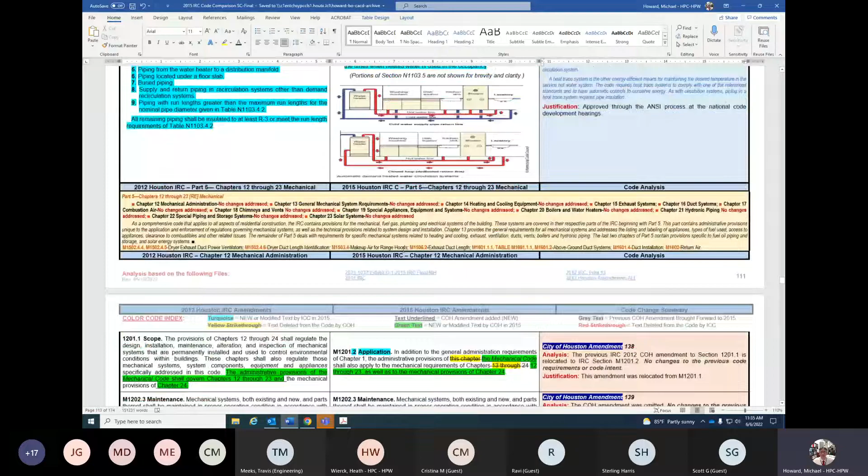Okay, pretty sure we left off right here, Houston Amendments. In Chapter 12 is the Mechanical Administration section, and you'll notice that Section M1201.2 application, we have an amendment in this section that basically says that the administrative provisions of the mechanical code shall also apply to the mechanical requirements of Chapters 12 through 23, as well as to the mechanical provisions of Chapter 24 of the IRC, or of this code. Probably should have said this code, but I think there's no real change.

You can see that in the previous Houston Amendment, the same code amendment was in there. So there's no change to the code requirements. No changes to the code intent for that section or the next section for maintenance. There was a previous City of Houston Amendment that struck the last sentence to the maintenance section. And we didn't really have a justification for why that was struck. So we weren't able to justify striking it in the current code. So that previous Houston Amendment in M1202.3 is no longer striking the last sentence.

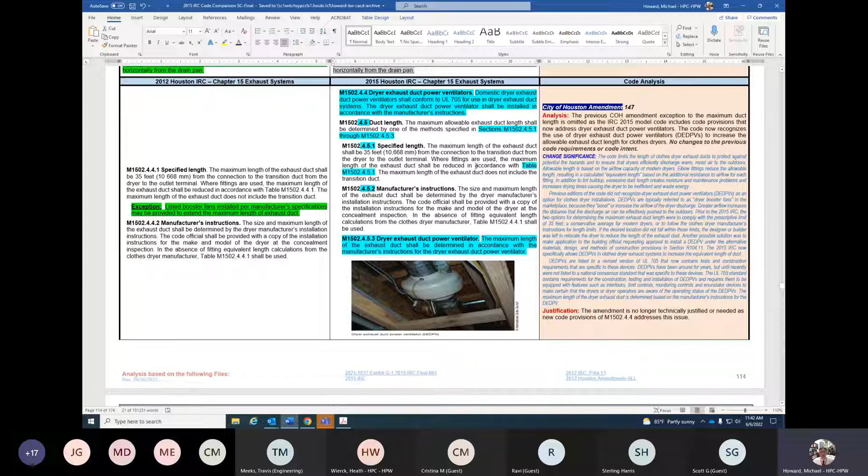There was a previous City of Houston amendment exception to the maximum duct length in the IRC. It's omitted as the IRC 2015 model code already includes code provisions that now address dryer exhaust duct power ventilators. As you can see, this particular section 1502.4.4 dryer exhaust duct power ventilators was extensively updated by the model code, and you can see that by all this blue text. So now they're allowing these dryer exhaust ducts to use power ventilators to extend the length of the duct, where they didn't actually talk about those items in the past. So that's actually going to be a slight change, and it should allow for longer lengths of domestic dryer ducts, where the dryers actually include those power ventilators.

As you can see here in M1502.4.5 of the 2012 code, there was a Houston amendment that said where the overall length as specified by a particular section exceeds 35 feet, the equivalent length of the exhaust duct shall be identified on a permanent label.

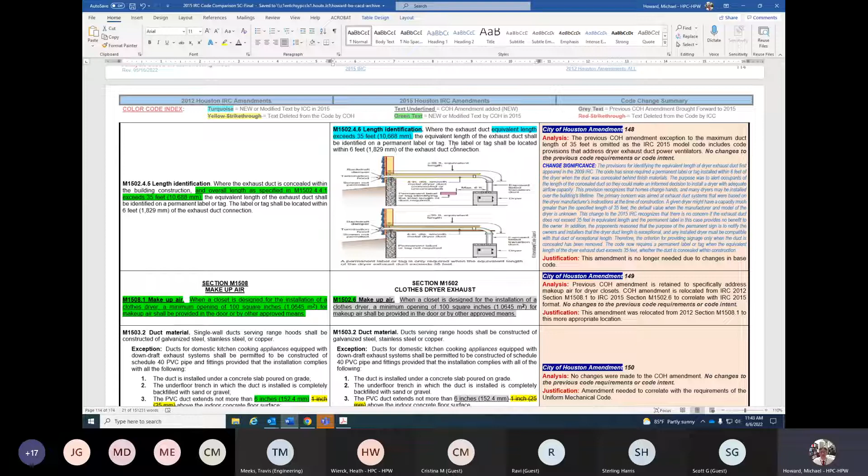Length identification is now located in M1502.4.6, not .5. And basically, it's saying that where the exhaust duct equivalent length exceeds 35 feet, the equivalent length of the exhaust duct shall be identified on a permanent label or tag, just like the previous code. So there's really no changes to the previous code requirements or code intent.

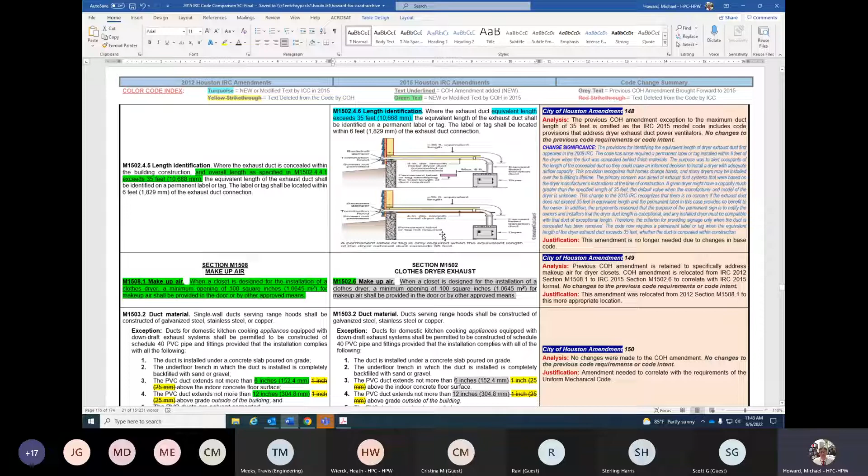If you're exceeding that 35 feet for the dryer duct length, then you just have to identify that on a label next to the dryer duct.

The previous City of Houston amendment for makeup air in section M1508.1 was brought forward, but it is now located in M1502.6, which is titled makeup air. And the requirements didn't change at all. It's the same requirements, but the previous amendment is retained to specifically address makeup air for dryer closets. The City of Houston amendment is relocated in the new code, as I said, but the code requirements did not change.

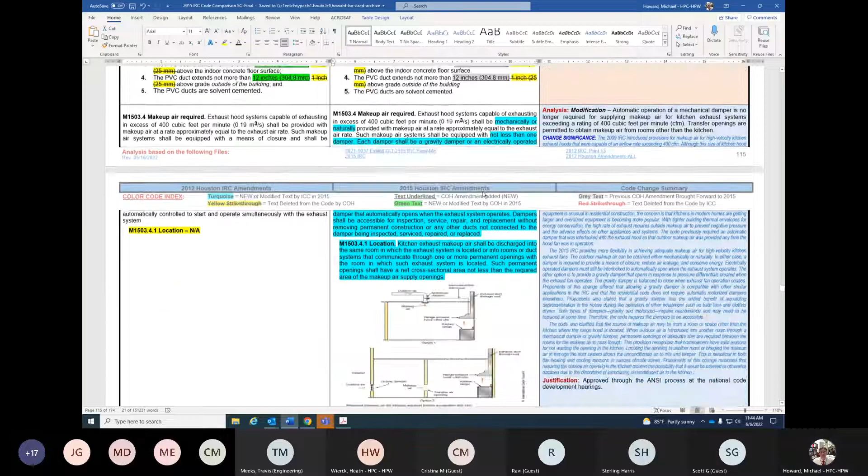There was a Houston amendment in section M1503.2 of the 2012 code, and that was brought forward to the same section in the 2015 code with no changes, and you can see that in this particular code comparison. Let's get down to the next City of Houston amendment.

Chapter 16 is duct systems, and the previous City of Houston amendment was omitted. This amendment is no longer needed as duct design requirements of SMACNA address the issue sufficiently. The list of duct system requirements has been revised to reference the applicable standards and delete redundant language. The table for material thickness of metal ducts was replaced with what is currently consistent with the SMACNA sheet metal construction standard.

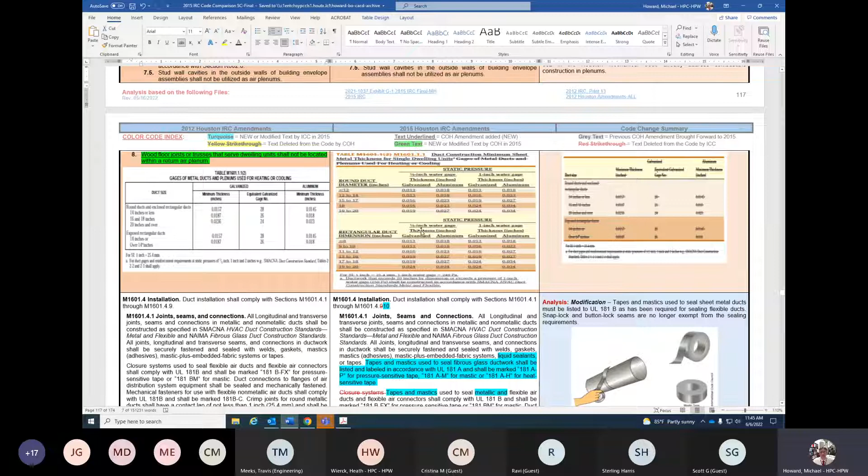So essentially, the model code is being used in this case, and we didn't really need to include this previous strikeout because it's already sufficiently addressed in the current codes. You can see that they added this table, M1601.1.1, duct construction minimum sheet metal thickness. So now there's this table in there that goes into a lot more details about the thicknesses of duct, which comes straight out of the SMACNA standards.

As you can see in the previous code, there was a table for gauges of metal ducts. Well, that got completely replaced by this new table.

There was a City of Houston amendment in M1601.4.3 for supports, which identified certain size requirements for the metal straps and galvanized wire at certain intervals. And now the model code basically requires you to comply with the SMACNA rules for those same requirements.

And that should help these mechanical installers because they're already familiar with SMACNA anyway. So if they know the SMACNA rules and requirements, they can just completely follow those and not have to worry about violating an IRC requirement.

Again, this is one of those sections, M1601.4.9, that talks about flood hazard areas, and there was a previous pointer to the city code, which was retained and brought forward into the new code, but is now located in 1601.4.10. So the code section just changed a little bit, but the intent and the requirements did not change at all.

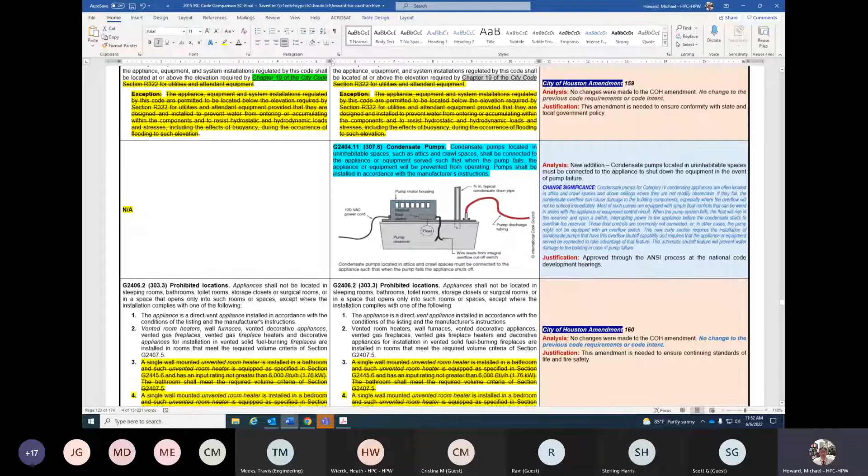Again, section G2404.7 of the previous code and the current code have to do with flood hazard areas and just have a pointer to the city code chapter 19. No change to the code requirements or code intent.

There was a City of Houston amendment under prohibited locations that struck two of the listed items, and we brought that same Houston amendment forward with no changes other than just bringing it forward. So the same two items that were struck previously are struck in the new code.

There was a section, G2411.1.1, that addresses CSST, corrugated stainless steel tubing, and there was a sentence added that basically said corrugated stainless steel gas piping systems shall be bonded per the manufacturer's installation instructions. The City of Houston Amendment was omitted, as the model code specifically requires compliance with the manufacturer's installation requirements in every application. So it was felt that we didn't need to add a City of Houston Amendment to this section where it was already addressed. That previous City of Houston Amendment was eliminated. There's no change to the code requirements or the code intent that have to do with corrugated stainless steel tubing.

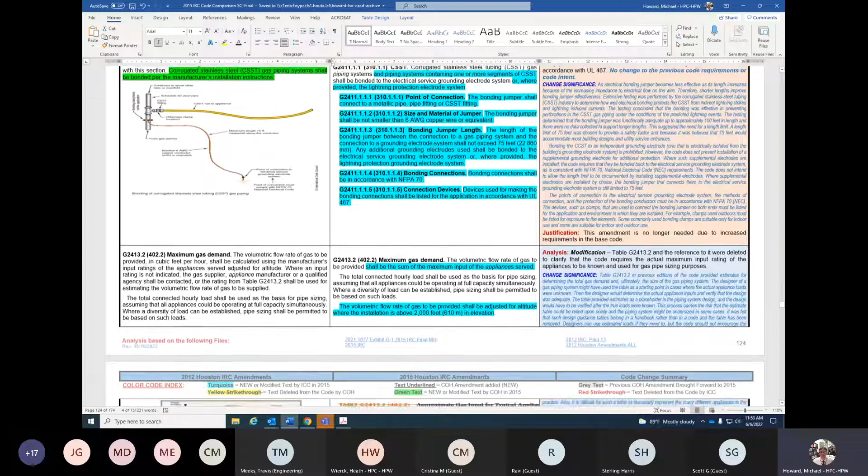The previous City of Houston Amendment in the 2012 code for liquefied petroleum gas was brought forward with no changes.

Let this person in real quick.

And that was in section G2412.2. As you can see, when it's grayed out like that, it means the Houston Amendment did not change. It just came forward just as is.

Same thing in the very next section that talks about sizing for gas piping. The previous City of Houston Amendment was just brought forward, and there's no change to the code requirements or the code intent.

Section G2413.6 was struck in the 2012 code, and the same section in the 2015 code was struck also. We just brought that City of Houston Amendment forward. So there should be no change to the code requirements or code intent that applied and were addressed by that section.

Metallic fittings. There was a previous City of Houston amendment under metallic fittings, number 3, that says brass or bronze fittings, if exposed to soil, should have a minimum 80% copper content. That same code requirement and Houston amendment was brought forward into the 2015 code. And as you can see, there's a lot of blue, so the model code actually expanded to include an additional item listed in this particular section. It now says where pipe fittings are drilled and tapped in the field, the operation shall be in accordance with all the following, and then it lists five items that everybody will have to comply with if drilling and tapping fittings in the field.

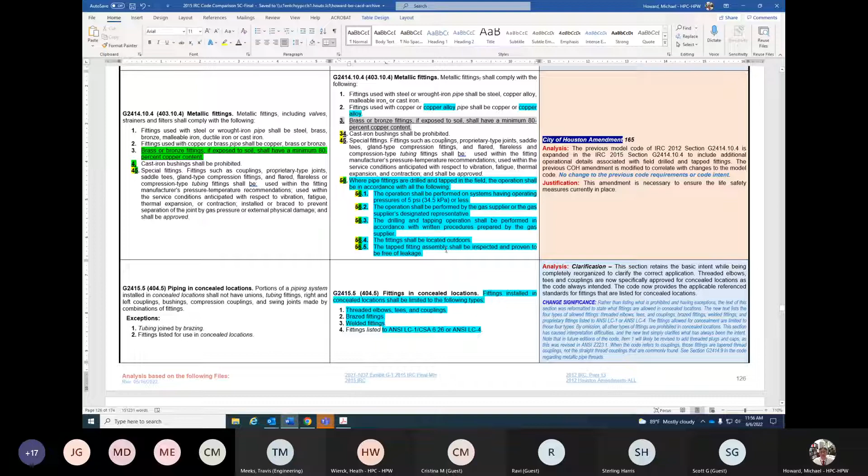In G2415-6, the previous City of Houston amendment was brought forward. There are some minor editorial changes to delete requirements that are already included in other volumes of the Houston Construction Code, so it wasn't felt that it needed to be duplicated in the IRC. The extended text of the previous amendment is no longer needed since specific details are identified in HPC handouts, which the Houston Permitting Center provides to address certain things identified in this previous code section.

The next two sections cover protection against corrosion and individual outside appliance. There are two City of Houston amendments from the previous code that were brought forward, with no changes to those particular requirements. So the intent should remain the same, and the application should remain the same.

That also applies to G2415.17.1, limitations for plastic pipe. The previous City of Houston amendment included a dimension for a minimum depth of 18 inches of coverage, which you'd think is a typical coverage requirement for all gas piping, but apparently if you don't mention it, someone will not bury it as deep as it's supposed to be.

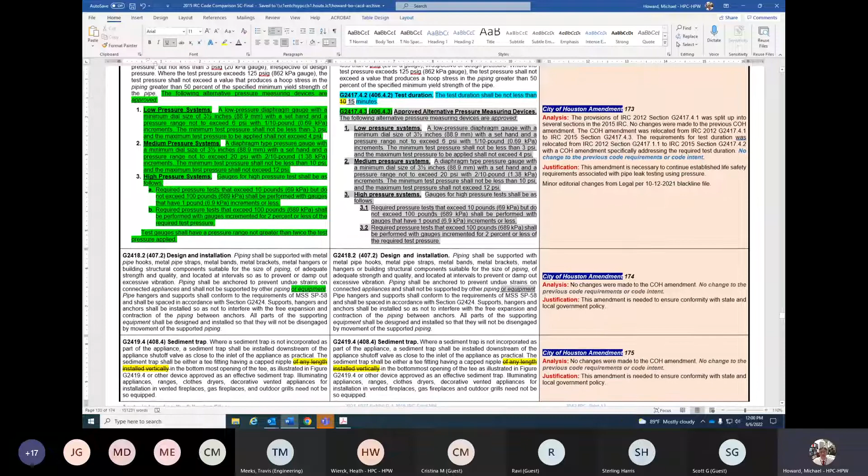Again, G2417.4.1 goes into more detail about the test pressure requirements, and the previous City of Houston amendment was brought forward to the 2015 code. You'll notice it's worded a little differently - it just has numbers instead of letters under item 3. But other than that, it's exactly the same as it was before, so there shouldn't be any change to how you guys do business out in the field when you're trying to get your pressure tests done.

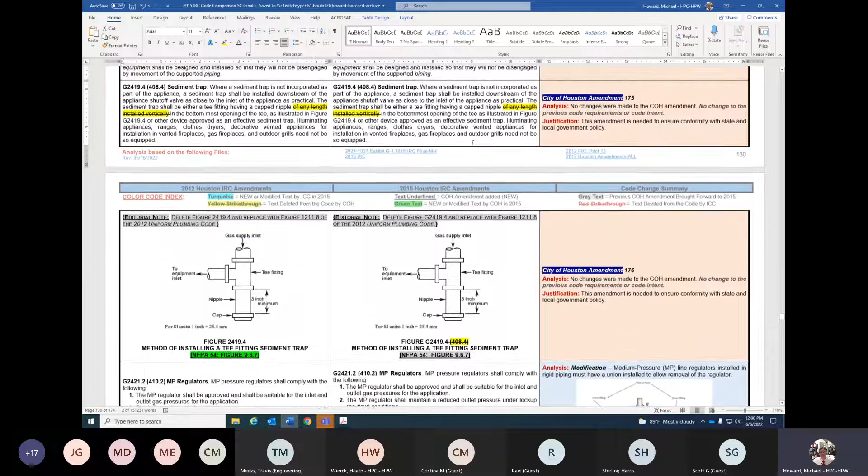Same thing applies to G2418-2. There was a minor previous City of Houston amendment that was brought forward to the new code. Same thing goes with the very next section for sediment traps - there was a previous City of Houston amendment that struck a few words out of the model code text, and that same text was struck out of the 2015 model code.

In section G2423.1, there was a previous Houston amendment that addressed CNG fuel and other operations, and that same amendment was brought forward, basically saying it has to comply in accordance with the fire code. It has to do with motor fuel dispensing facilities for CNG fuel, and their operation shall be in accordance with the fire code. There's no change to the Houston code requirements. I don't really know anybody with a residence that would have something like this, but I guess it's possible.

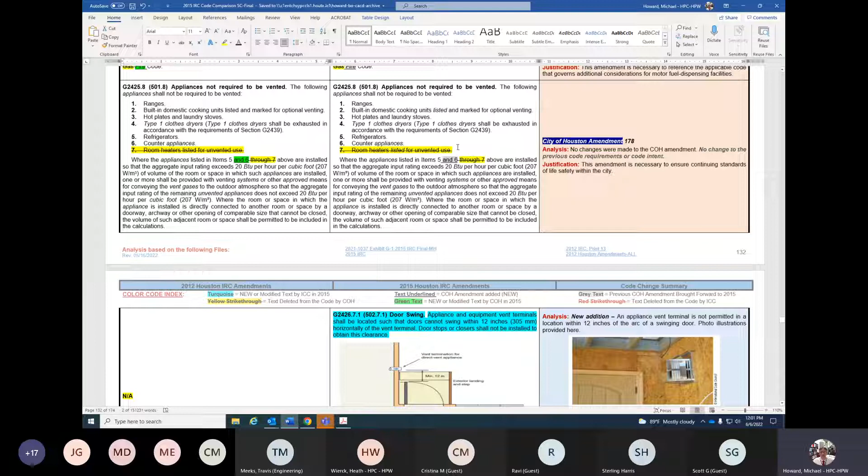Appliances not required to be vented - there's a Houston amendment that was in the previous code, and that amendment was brought forward. It eliminates item 7 out of this model code text, and there's no change to the previous Houston amendment or the code intent.

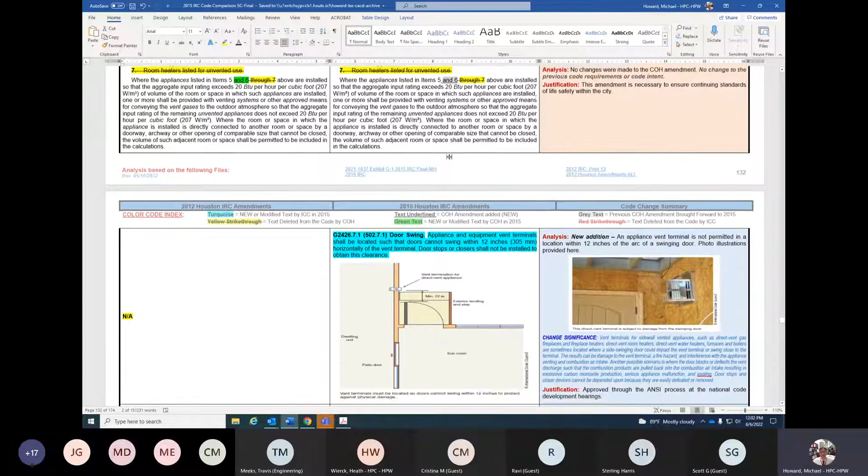Back down to specific lengths - where are we at? The maximum length of exhaust duct shall be 35 feet. Here it looks like we're back in dryer duct vents. And there's an exception that says listed booster fans installed per manufacturer specification may be provided to extend the maximum length of the exhaust duct, as we talked about earlier. There's another section that goes into even more detail about manufacturer's requirements and lengths, but the previous City of Houston amendment exception was maintained and brought forward into the new 2015 code.

In G2439.5.6, there was a previous Houston amendment stating that when the overall length specified in a particular section exceeds 35 feet, certain requirements apply, including identification on a permanent label or tag. Those same requirements are brought forward into the 2015 code, so there's no change to the previous code requirements or Houston amendments.

Unvented room heaters. There was a previous amendment in G2445.1 that basically said unvented fuel burning room heaters and decorative appliances shall be prohibited. That same section was brought forward to the 2015 code, but now it's worded a little differently. The title is 'prohibited fuel burning room heaters and decorative appliances,' and it states unvented fuel burning room heaters and decorative appliances shall be prohibited.

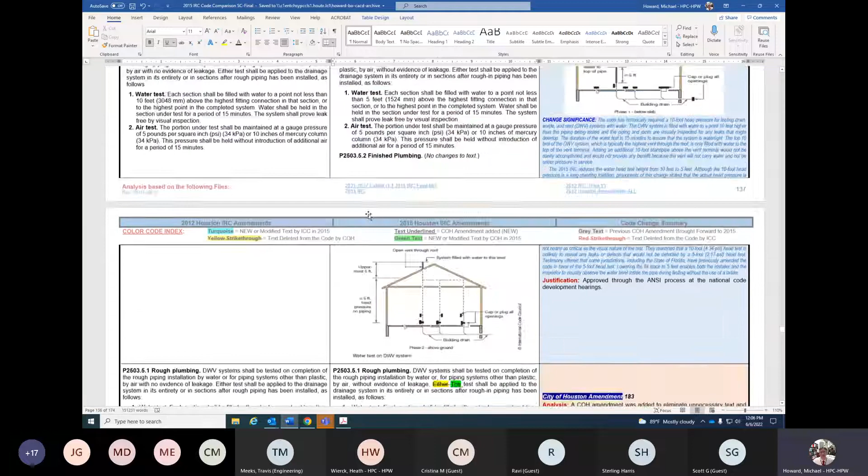Rough plumbing. In the 2012 code, there was no amendment to the rough plumbing section. There is a City of Houston amendment added to eliminate unnecessary text and to ensure that DWV systems are installed and tested in accordance with minimum city standards and typical plumbing installation requirements. That's why you see some of this modified.

There was a modification done to section P2603.2.1, protection against physical damage. For piping installed through bored holes or in notches, the minimum clearance distance from the concealed piping to the edge of the framing member has been reduced from 1.5 inches to 1.25 inches. Protection is required for piping installed less than 1.25 inches from the edge of the framing members. So as long as you have more than 1.25 inches of depth, you wouldn't necessarily have to provide this protection.

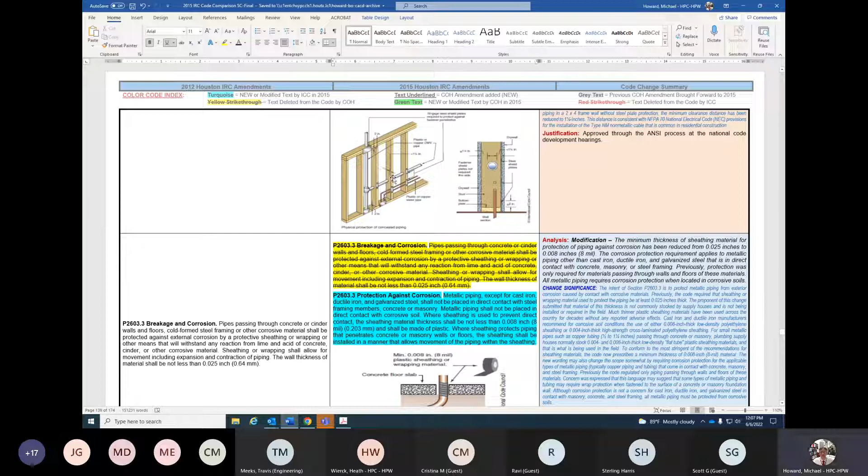You can see this example here where the pipe is going through the plates, and they have to put a steel plate in front of it to prevent someone from driving a nail or screw into that pipe. You can see this through all of these locations. But if you have enough depth, you wouldn't necessarily have to deal with that.

General: shower compartments shall have not less than 1,000 square inches. That Houston amendment, which was in the 2012 code, was brought forward to the 2015 code, along with the other two amendments in exceptions 1 and 2. There's no change to the code requirements or code intent for these particular code provisions, so it should be the same as it was previously.

There was a Houston amendment added to section P2708.2 for shower drains, now requiring a size of not less than 2 inches in diameter. The amendment was added to correlate with the minimum requirements of the Houston plumbing code. This is one of those situations where the residential code was a little different from the Houston plumbing code, and we needed to correlate those two.

There was a previous City of Houston amendment provided for P2709.5, test for shower receptors. That previous Houston amendment was brought forward with no changes, so there's no change to the code requirements or code intent for that particular issue.

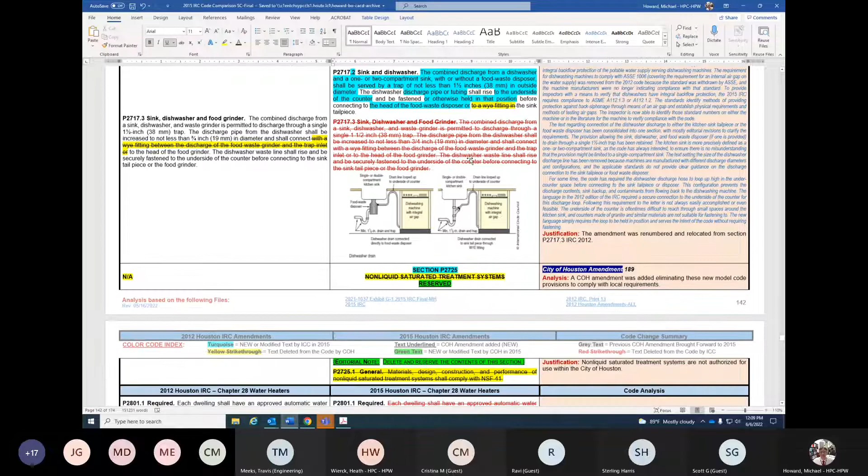There was a previous Houston amendment in section 2717.3 for sink, dishwasher, and food grinders that struck some text. That amendment was renumbered and relocated, with no changes to the code requirements or code intent. So instead of being in section 2717.3, it's now in 2717.1 and 2, but it doesn't really change the code requirements—they're the same.

There's a Houston amendment to section P2725 that addressed non-liquid saturated treatment systems. That entire section was deleted and reserved. The City of Houston amendment was added, eliminating these new model code provisions to comply with local requirements. So apparently you can't do these anyway.

All right, section 2801 through 2801.6.1 have Houston amendments that address specific things. The code now specifically requires drain valves and a threaded outlet for water heaters. The water heater pan requirements have been expanded to accept aluminum and plastic pans of the prescribed thickness.

The code clarifies that a pan drain is not required when a water heater is replaced and there is no existing drain. The model code was expanded to include additional code clarification and guidance. A City of Houston amendment was added to provide additional clarity and to identify that listed pans should be used where they are available. Where allowed, new code text addresses minimum requirements for the use of plastic pans. The model code was modified to include additional clarity. A City of Houston amendment was added to address local requirements for installations.

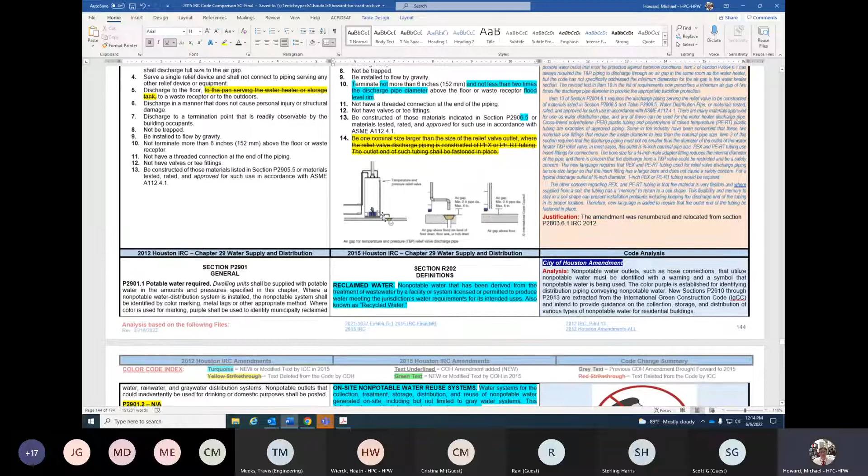The temperature and pressure relief valve discharge pipe termination must have an air gap suitable to protect the potable water supply distribution system of the building. PEX and PE-RT tubing used for relief valve discharge piping must be one size larger than the T&P valve discharge outlet, and the outlet end of the tubing must be fastened in place. So these are some of the things that got expanded by the international code, and it includes some details, some drawings you might want to take a look at on here to hopefully help give you a little more understanding of what they're talking about.

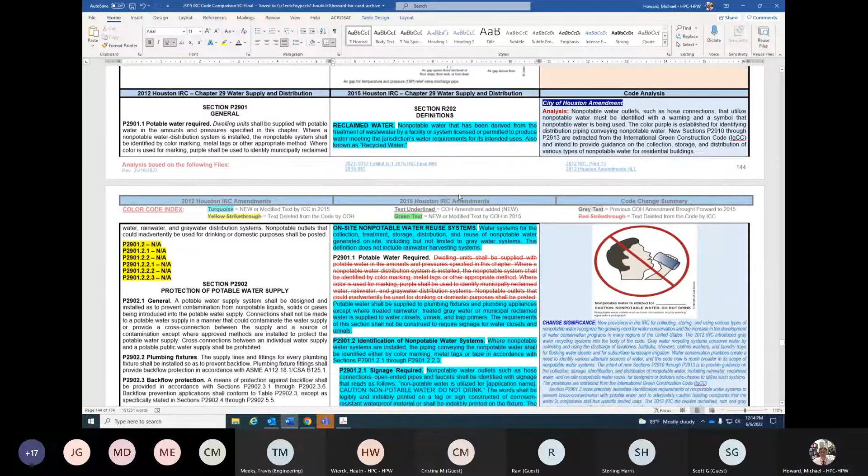Let's go down to the next amendment. Connections to boilers. The previous City of Houston amendment is modified for clarity only and was brought forward. There were no changes to the code requirements or code intent for this particular section.

In section P2902.5.5 for solar systems, there was some text eliminated out of that particular section. And then the exception included an editorial strike, and those particular amendments were not brought forward to the same section in the 2015 code. The model code provisions extensively cover solar thermal systems heating potable water distribution systems, and the City of Houston amendment was omitted for model code provisions because they sufficiently address all the requirements. So they cleaned up the code sections, and there was no need to make that change.

The model code also added a new section called direct systems for other than potable water distribution systems. And ICC modified the model code provisions extensively for solar thermal systems and heating potable water distribution systems. The City of Houston amendment was added to correlate with local policy. So there was a City of Houston amendment that struck "with an intermediate atmospheric vent complying with ASSE 1012." Only that was struck out of that.

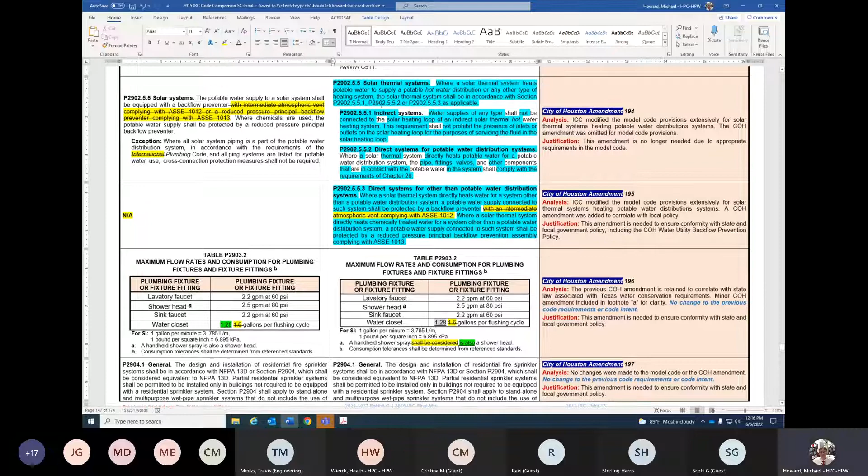And if you notice, that's the same text that was in the previous code section, but it was in a different code section. So because ICC expanded these particular code requirements, the previous Houston amendment sort of got split up amongst the sections, but the requirements did not change.

There's a Houston amendment that was in the previous code for maximum flow rates and consumption for plumbing fixtures and fixture fittings that got brought forward into the current code without change. There were some additional modification amendments added to one of the footnotes for clarity. It didn't change the code requirements. It's just to hopefully help clarify what the code requirements actually are.

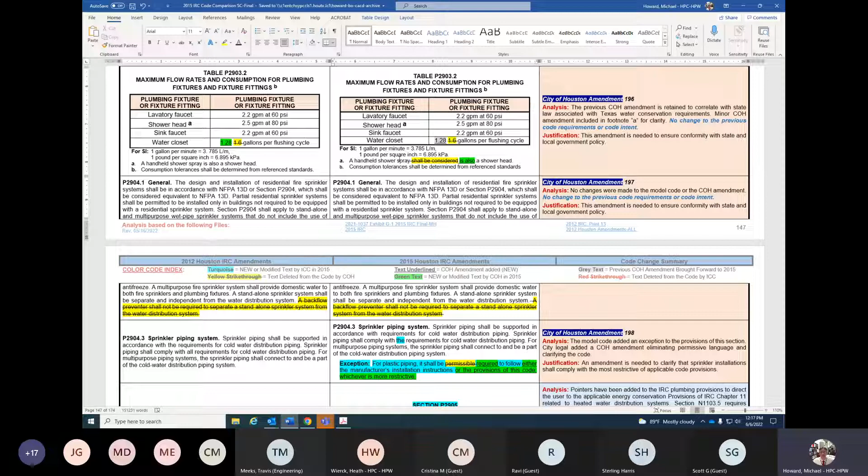And it has to do with a handheld shower spray. The words "shall be considered" were struck, and now it says "is also a shower head." So it just clarifies that the handheld shower is also considered a shower head.

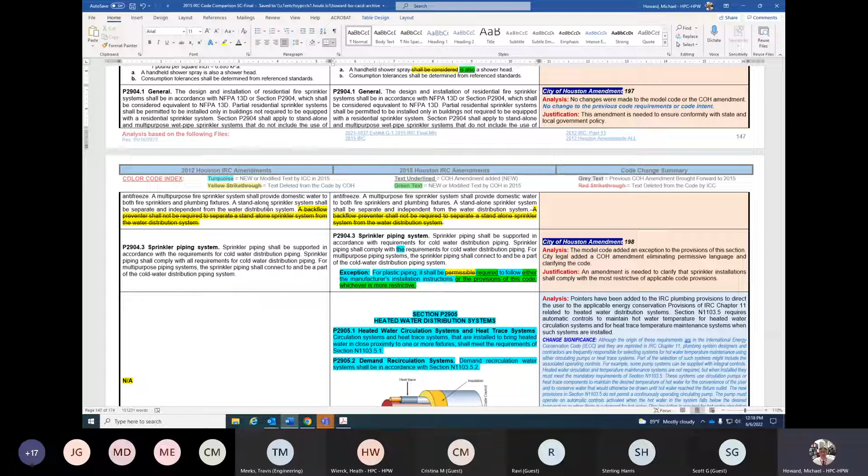Previous City of Houston amendment to section 2904.1 was brought forward. That amendment deleted the text that says that backflow preventers shall not be required to separate a standalone sprinkler system from the water distribution system. There's a City of Houston requirement that our potable water system has to be protected from all these types of possible contaminations. Sprinkler systems are one of them.

P2904.3 includes a Houston amendment. The model code added an exception to the provisions of this section. City legal added a City of Houston amendment eliminating passive or permissive language and clarifying the code requirements. So it shouldn't actually change the code requirements. It's intended to just eliminate permissive language and be more clear.

Basically, the exception says for plastic piping, it shall be required to follow either the manufacturer's installation instructions or the provisions of this code, whichever is more restrictive.

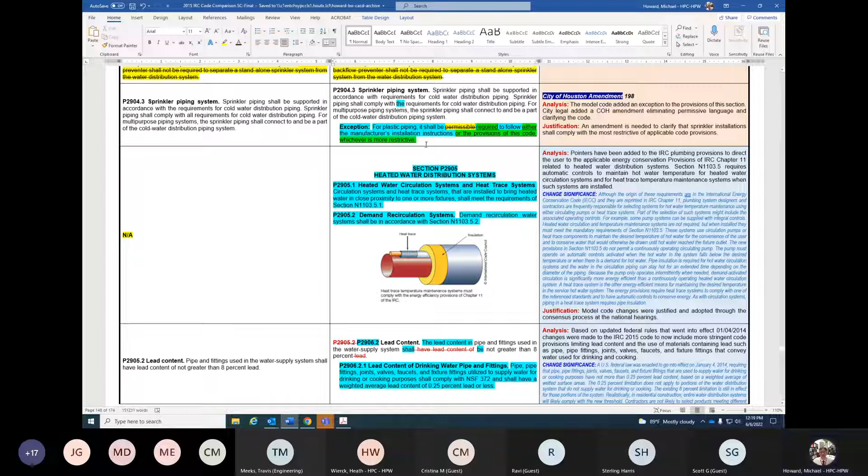Let those guys in, okay, go back.

Section 2905.8, joint and connection tightness. There was a previous City of Houston amendment that said no joints shall be permitted under slabs. That same Houston amendment was brought forward, but is now located in 2906.8. No change to the code requirements or code intent.

There was a Houston amendment added to Section 2906.5 that addressed cross-linked polyethylene plastic, or PEX. The provisions of this section in the model code were relocated from IRC Section 2905.9.1.4, and the City of Houston amendment was added for clarity and to coordinate with other relocated and renumbered sections. So essentially, we updated the sections in this particular code section to correlate with other code provisions to make sure that you got to the right code sections.

And what happens is, when amendments get added to certain other sections, it changes the numbers of the following sections. So then we have to update those sections in other code provisions like this one to make sure that you find what you're looking for when it's referencing a particular section.

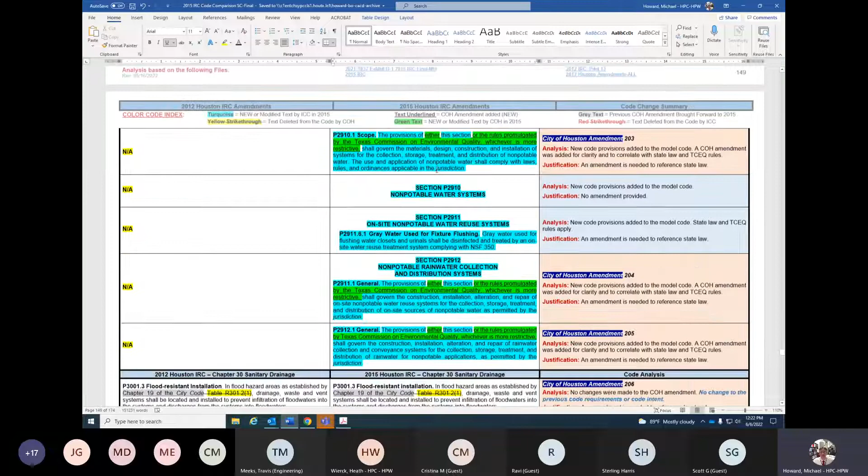There's a new code provision added to 2910.1, and the City of Houston amendment was added for clarity and to correlate with state law and TCEQ rules. And this has to do with non-potable systems and the Texas Commission on Environmental Quality for nonpotable water systems. And basically, the amendment just says the provisions of either this section or the rules promulgated by the Texas Commission on Environmental Quality, whichever is more restrictive, shall apply.

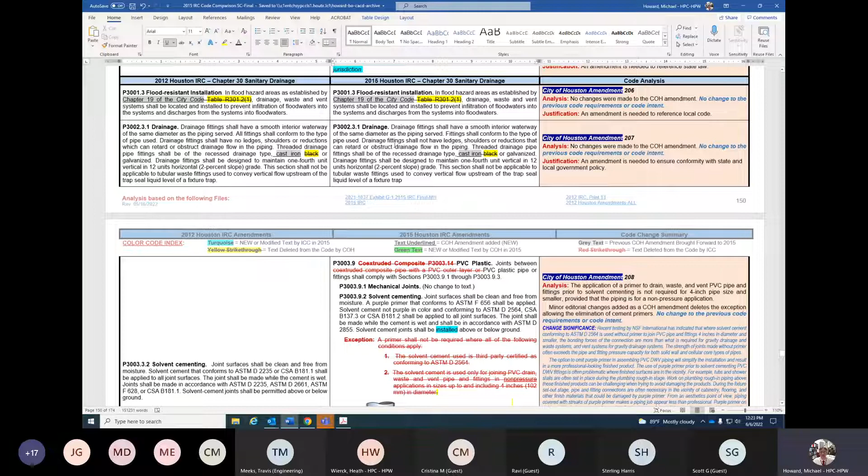And we're moving to Chapter 30, Sanitary Drainage. There was a previous City of Houston amendment for flood-resistant installation that was brought forward for 3001.3 and 3002.3.1. There was a previous City of Houston amendment that was also brought forward to allow cast iron or black. Instead of just calling it black, the more appropriate name, according to the plumbers, is to refer to it as cast iron.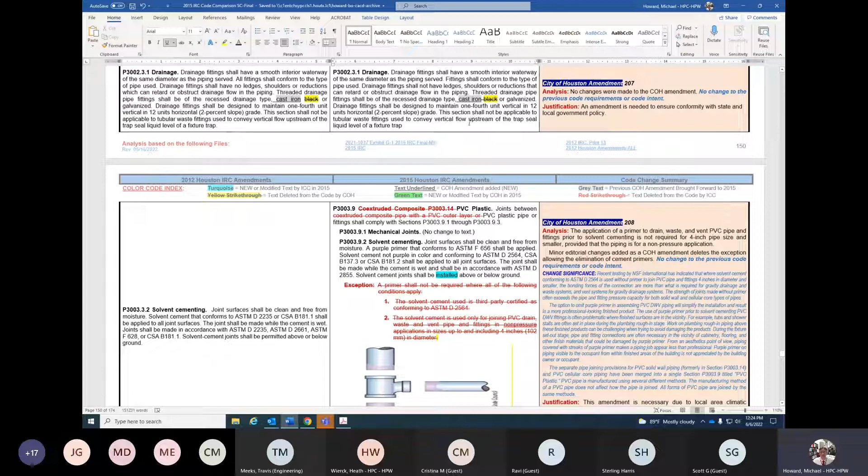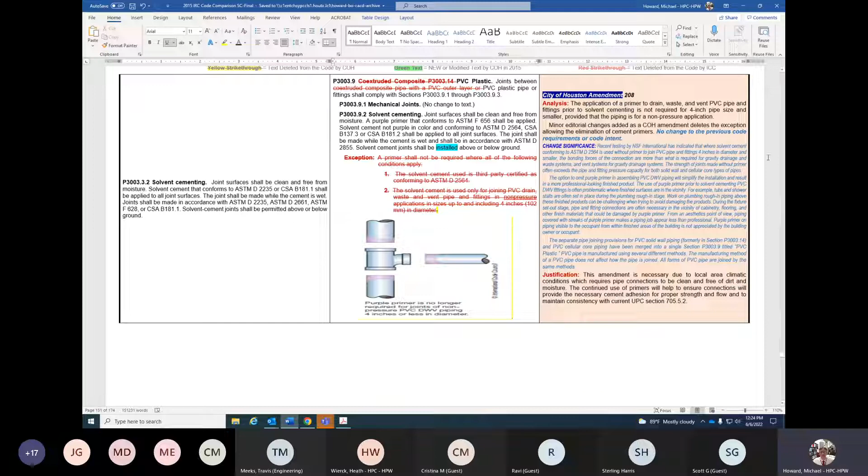Let's see. There's a Houston amendment added to solvent cementing sections under P3003.9. Sorry. The application of a primer to drain, waste and vent PVC pipe and fittings prior to solvent cement is not required for 4-inch pipe size and smaller, provided that the piping is for a non-pressure application. Minor editorial changes were added, and a City of Houston amendment deletes the exception allowing the elimination of cement primers.

So that means that you will continue to have primers for PVC applications, just to make sure that it's clean and that the glue is bonding like it's supposed to be.

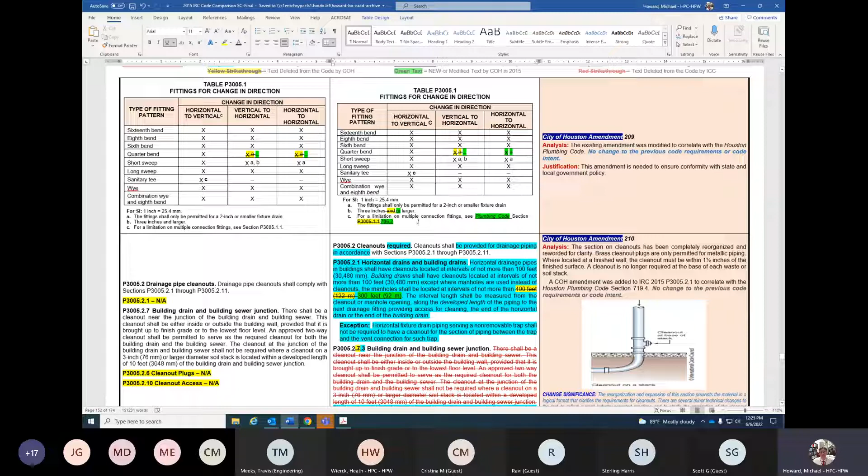There's a section for fittings for change in direction. There's a table that had some previous City of Houston amendments. Those same Houston amendments were brought forward and modified slightly to correlate with the Houston Plumbing Code. So this table now correlates better with certain provisions of the Houston Plumbing Code, which you have to comply with anyway. So hopefully that will help clarify certain installations out in the field.

Cleanouts required. This section, P3005.2, cleanouts, has been completely reorganized and reworded for clarity by the model code. Brass cleanout plugs are only permitted for metal piping. Where located at a finish wall, the cleanout must be within 1.5 inches of the finished surface. A cleanout is no longer required at the base of each waste or soil stack.

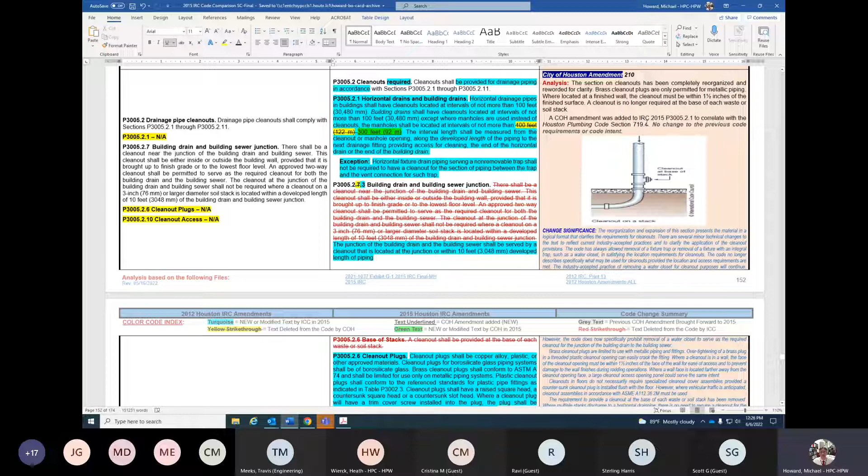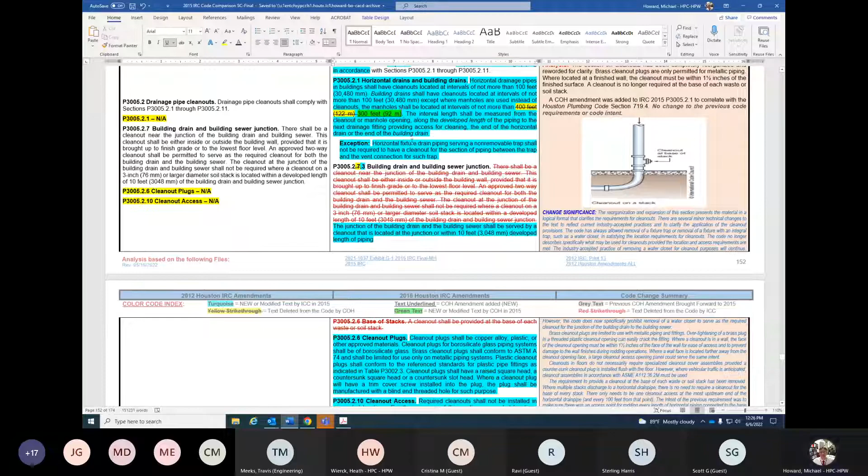A City of Houston amendment was added to IRC P3005.2.1 to correlate with the Houston Plumbing Code, section 719.4. There's no real change to the previous code technical requirements or code intent. Hopefully these changes that were added to this particular section will help clarify what the requirements are and include certain requirements that come from the plumbing code so that you don't get crossed up out in the field after the fact.

There was a City of Houston amendment added to section 3005.2.8, installation arrangement of a cleanout, to correlate with the Houston Plumbing Code section 719.4 also. The City of Houston change eliminates test tees as cleanouts. So this amendment was necessary to maintain consistency with the Houston Plumbing Code requirements.

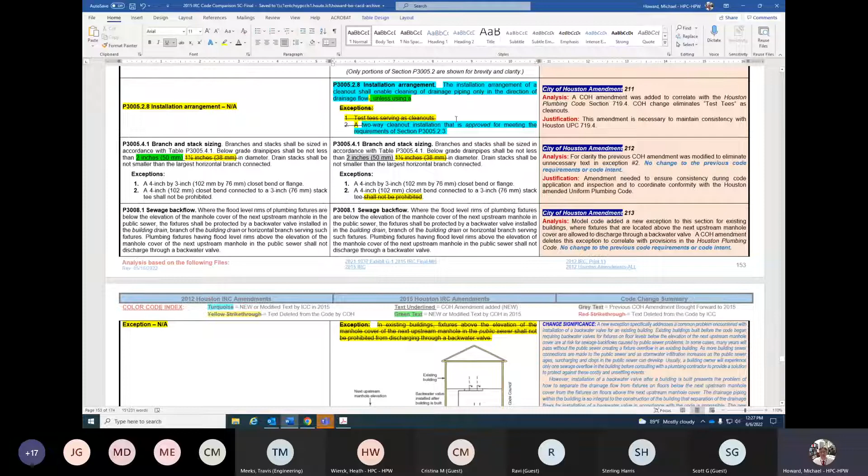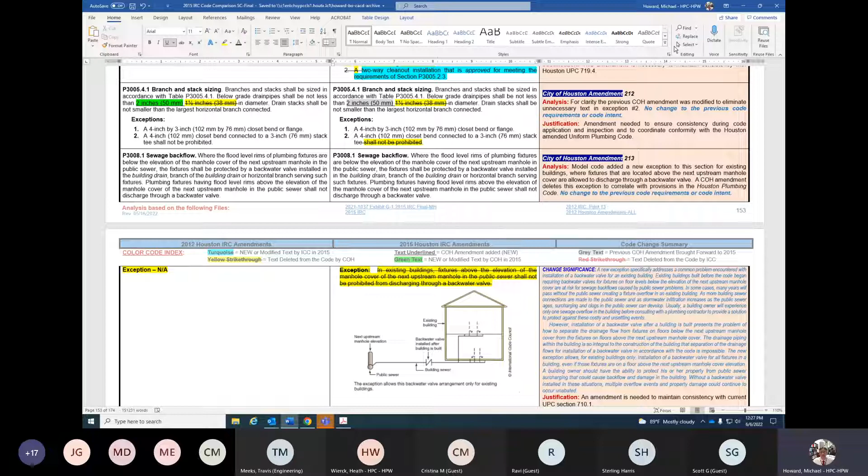In section 3005.4.1, there was a previous City of Houston amendment in that same section that got brought forward. And then the Houston amendment was modified to eliminate section exception 2. The technical code requirements didn't change and the code intent didn't change for this particular section.

Sewage backflow. Model code added a new exception to this section for existing buildings where fixtures that are located above the next upstream manhole cover are allowed to discharge through a backwater valve. A City of Houston amendment deletes this exception to correlate with provisions in the Houston Plumbing Code. You can see here where the City of Houston deleted the exception, and there's no change to the previous code requirements or code intent. So it should be business as usual in the field.

Gray water recycling systems, section 3009.1. A City of Houston amendment was added to correlate with state TCEQ rules for installations of gray water systems. Basically, the amendment is just a reference to the appropriate Texas Commission on Environmental Quality rules, and it says whichever one's more restrictive, the code or the TCEQ rules, those are the ones that apply.

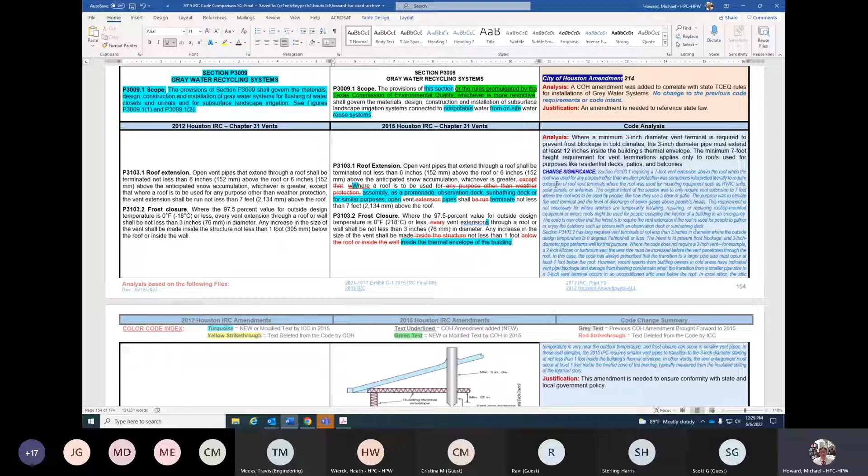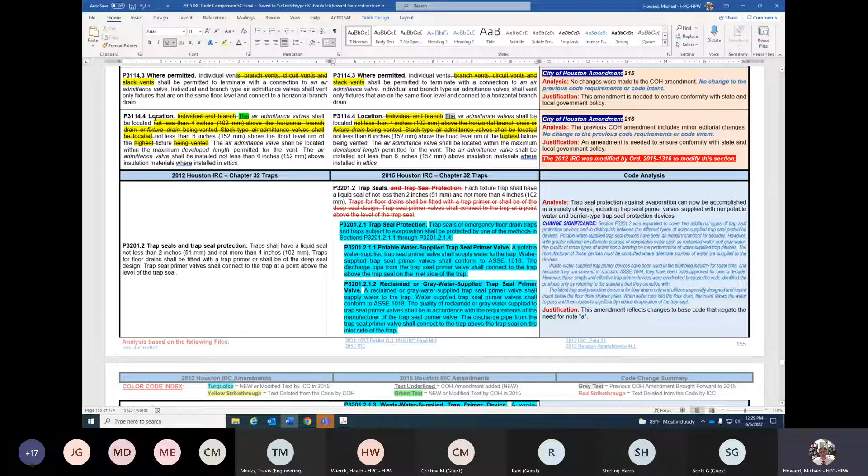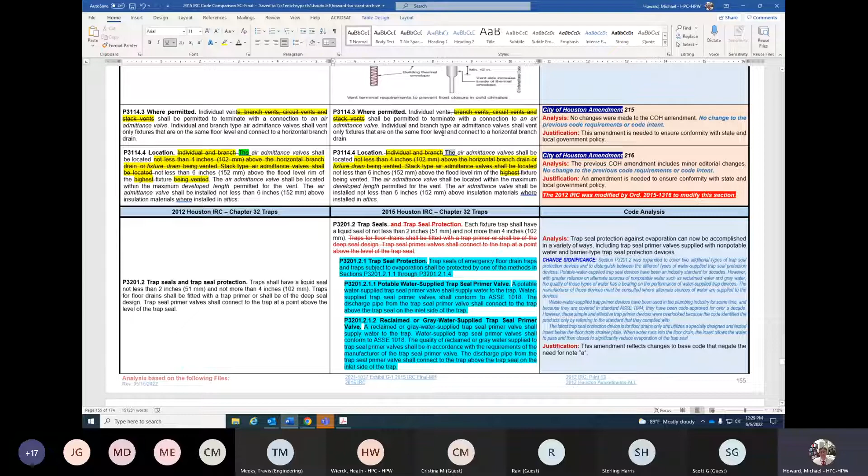Previous Houston amendments that were located in section P3114.3 and P3114.4 were both brought forward with no changes. So there are no changes to code requirements or code intent for either of those two sections.

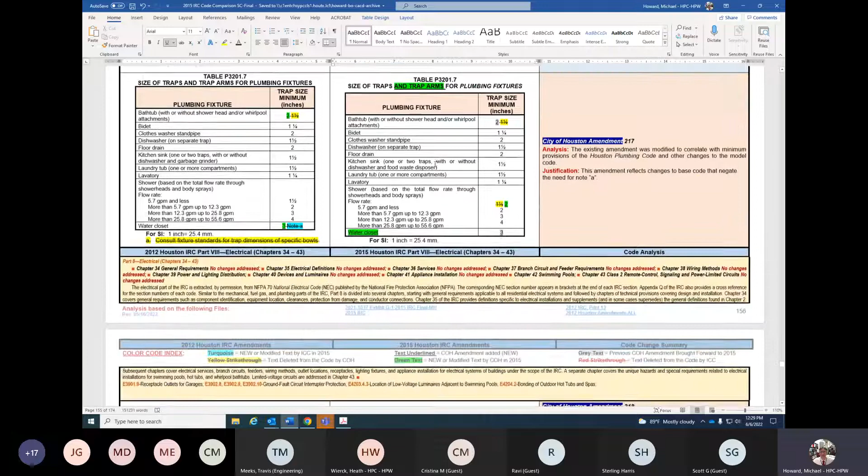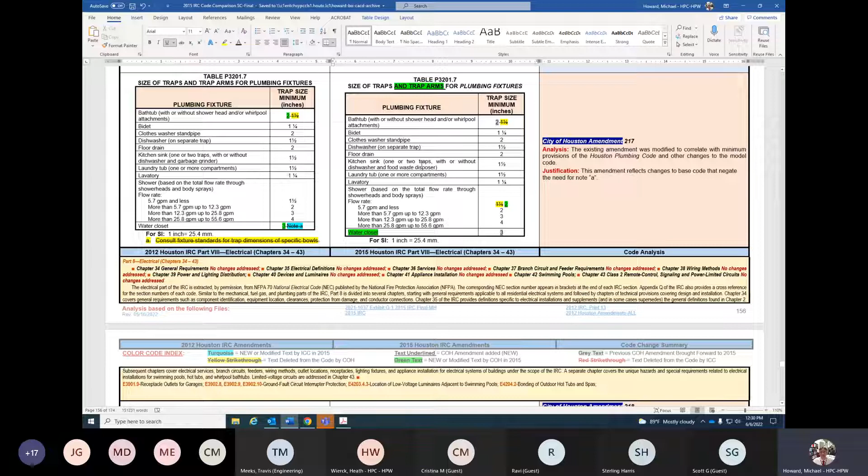Chapter 32 is traps. Let's go down. The first section that Houston amended is table P3201.7. There were some previous Houston amendments in that table. Those amendments were brought forward, and then there was an addition to that Houston amendment that updates the flow rate requirements for 5.7 gallons per minute or less shower heads to correlate with the Houston Plumbing Code. Other than that one addition, there are no changes to the code requirements for this particular code section.

Okay, we're moving on to a code requirement under part 8 of the IRC, which is the electrical provisions. The previous City of Houston amendment was brought forward, which basically just says delete chapters 34 through 43 in their entirety, and electrical has to be done per the NEC, just like any other electrical. No changes to the Houston code requirements.

In Chapter 44, the reference standards list, there were several standards that were updated or added to this list to be more up to date. One was identifying the current 2020 NEC instead of the 2014, because the 2015 IRC references the 2014 edition, and we're under the 2020 edition. Another standard that was updated is NFPA 241, updated to the 2019 edition, Standard for Safeguarding Construction, Alteration, and Demolition Operations. That particular standard was updated in all of the City of Houston codes to that edition of NFPA 241.

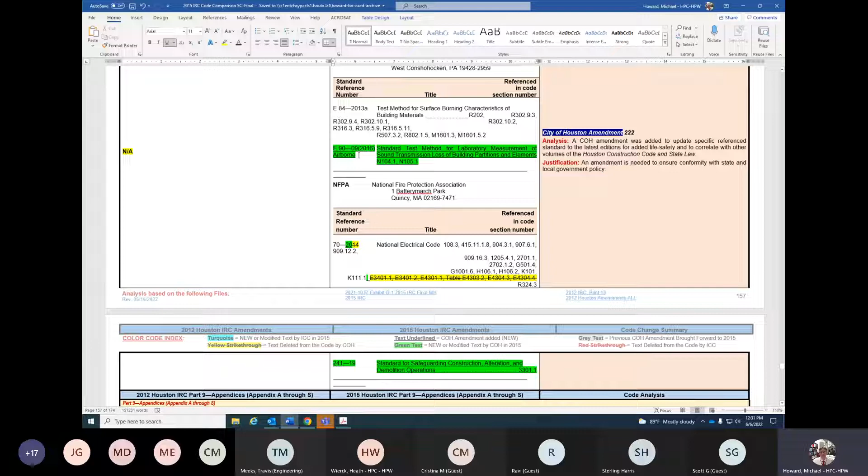There was a City of Houston amendment that added E90, the 2016 edition. That's a standard test method for laboratory measurement of airborne sound transmission loss of building partitions and elements. Those were the only 3 standards that got modified in the standards list.

Let's see, in the appendices, Appendix A of the 2012 code was adopted. Appendix A of the 2015 code was adopted. That appendix is sizing and capacities of gas piping. There's no change to the code requirements or code intent. We just adopt that appendix straight up.

Appendix B of the 2012 IRC was adopted. That has to do with sizing and venting of venting systems serving appliances equipped with draft hoods. That same appendix in the 2015 IRC is adopted also. No change to the code requirements other than whatever is in the model code for that IRC appendix. I don't remember there actually being any changes, but I'll have to double check on that.

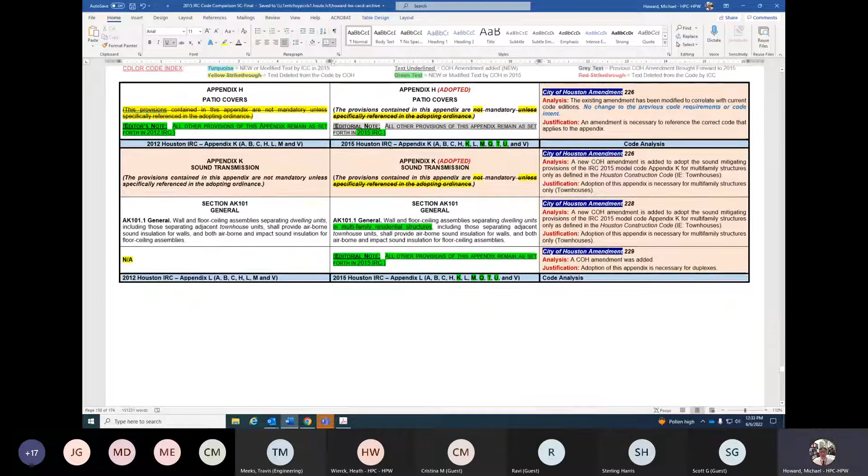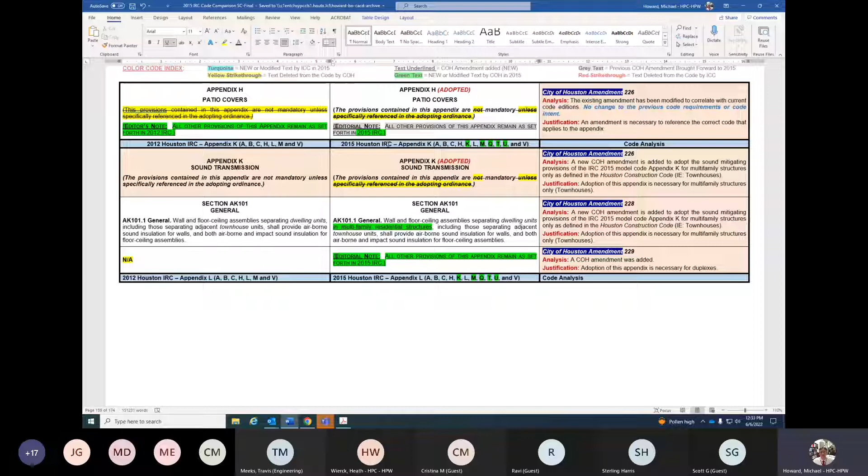Appendix C, exit terminal of mechanical draft and direct venting systems. Appendix C of the 2012 code was adopted with that same appendix in the 2015 code with no changes to that appendix. In the 2012 code, Appendix H was adopted, which is patio covers. We adopt that same appendix in the IRC 2015 code. There are no changes to that appendix.

And basically the Houston Amendment says, wall and floor ceiling assembly separating dwelling units in multifamily residential structures. This appendix does not apply to single one or two family dwellings, which includes duplexes. It only applies to townhouses that include three or more attached dwelling units. No other changes were made to that appendix.

Let's see, Appendix L. No changes were made to the City of Houston Amendment for Appendix L, but the entire appendix was replaced with the following. Basically light frame conventional construction. This particular appendix can be used as one of the six options if your wind speed for your particular area exceeds 140 miles per hour. But like we talked about earlier, you're probably not going to run into any that exceed 140 miles per hour in the Houston area, at least. There were some minor updates for clarification. As you can see, these highlighted words are the changes that apply.

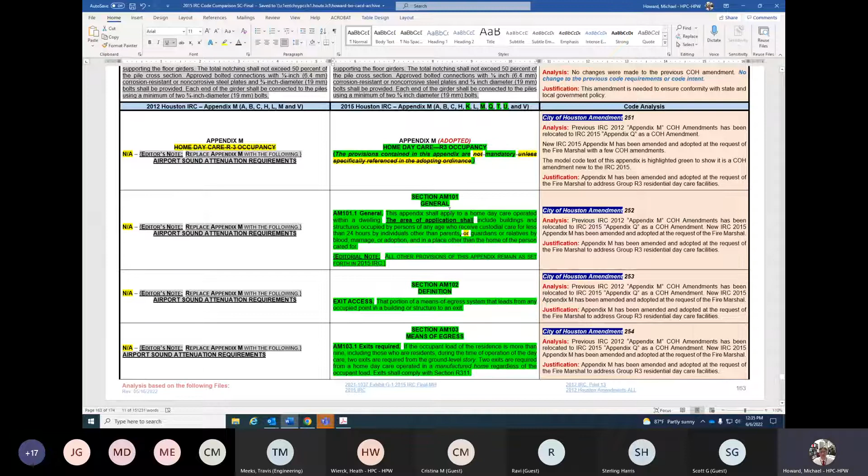Appendix M, home daycare, was adopted in the 2015 code. Like I said earlier, that was specifically requested by the Houston Fire Department. So when you're submitting your plans to the plan analyst, even though it might be a single family residence, if you're intending on using your house for a home daycare facility, you're going to want to identify that specific use on the use line to let them know.

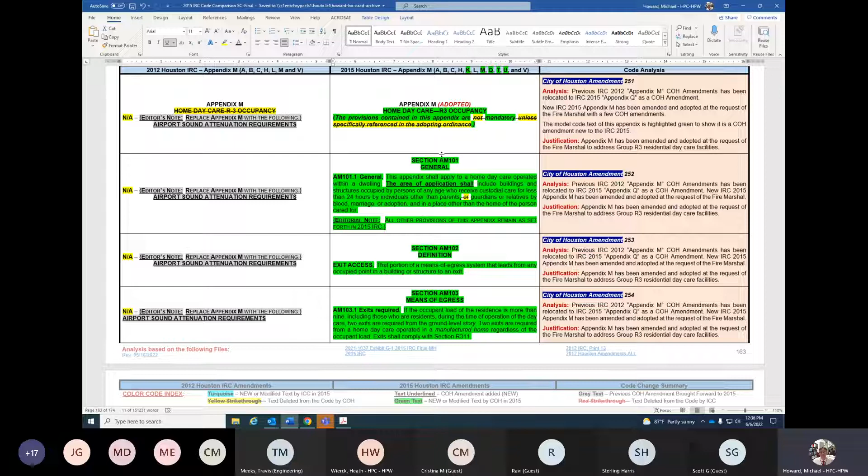Because what will happen is if you build a brand new house and then the fire marshal goes out later and they happen to find out that you're using it for a home daycare facility and it was built to the 2015 code, then they're going to make you come back and update your structure to comply with this appendix, because the facility should have been constructed to meet these requirements. So I know that not everybody knows what they're going to use their house for, and things change over time, and that's fine. That can happen.

It's just a matter of when you decide to change your single family residence to a home daycare, then you would have to come back and submit plans to upgrade certain things to comply with this Appendix M requirement. And then you would get a CC, a certificate of compliance, that specifically indicates that home is being approved for use as a home daycare also.

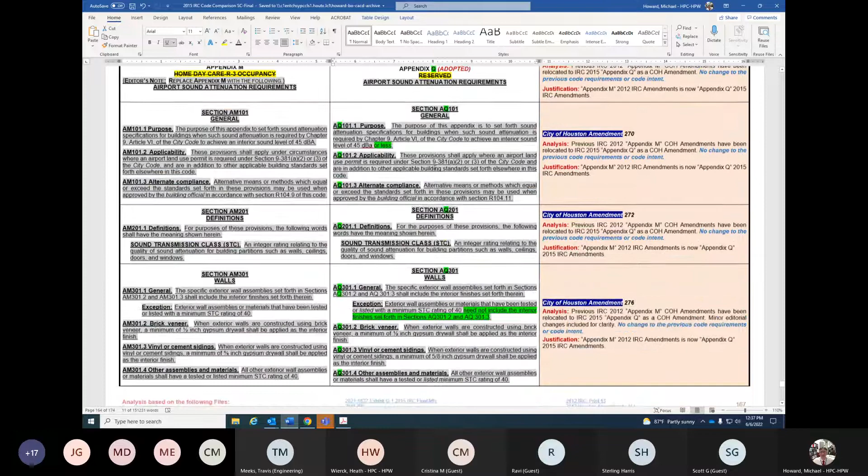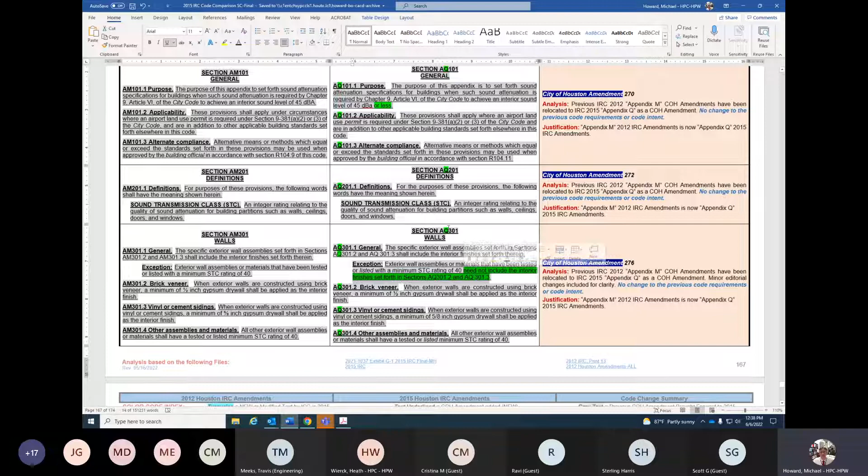Appendix Q, as I mentioned earlier, is the airport sound attenuation requirements. Previously, it was located in Appendix M of the IRC, and as you can see, there's not very much change to it. Most of these changes have to do with correcting the right appendix letter and identifying certain sections that are different than what it was previously. As far as the code requirements, they're all typically the same. There's no changes to the technical code requirements or code intent. These updates are just identifying the appropriate code sections that you want to comply with to meet these requirements.

Appendix T was adopted in the IRC. Appendix T has to do with tiny houses, and you're not going to find this text in the 2015 model code. Tiny houses didn't go into the code until I think the 2018 code, and we actually had to go out to the 2018 IRC and bring that code section back to the 2015 code as an amendment. So that's why you'll see this entire appendix is an amendment in the 2015 codes, because we had to bring that from the 2018 code.

You can see that building a house to tiny house code provisions is not the same as building to the IRC general requirements. This tiny house appendix is specific to houses that are 400 square feet in area or less, and it specifically identifies what you can do in that 400 square foot tiny house.

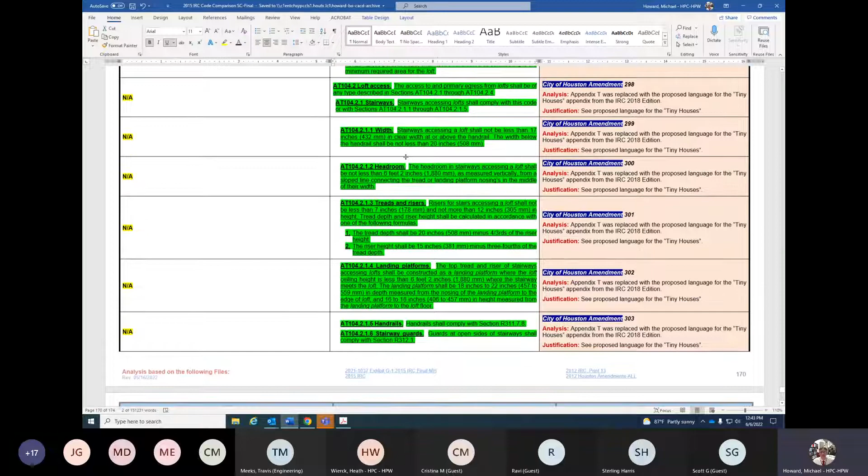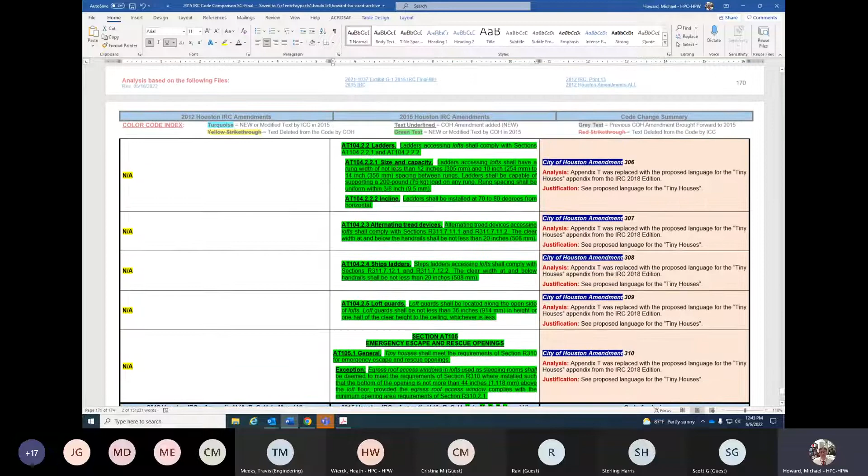Each little thing that's associated with these tiny houses has its own requirements, and if it's not specifically identified in this appendix, then it falls back to base code requirements.

Appendix U is adopted — Appendix U is the Solar Ready provisions for detached 1 and 2 family dwellings. The appendix is adopted in its entirety, and it only has one Houston amendment, and that's the amendment for U-103.6, which basically says conduit not less than 1 1/4 inches shall be installed to provide a pathway from the electrical panel to the underside of the roof sufficient to allow future installation of solar equipment.

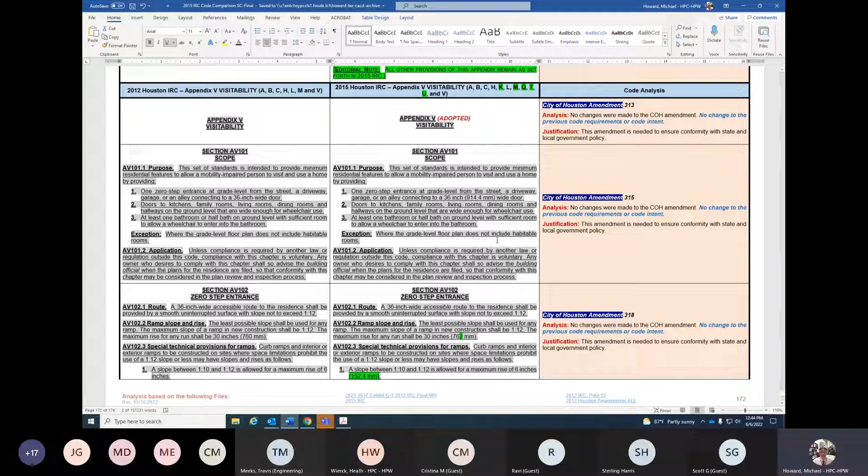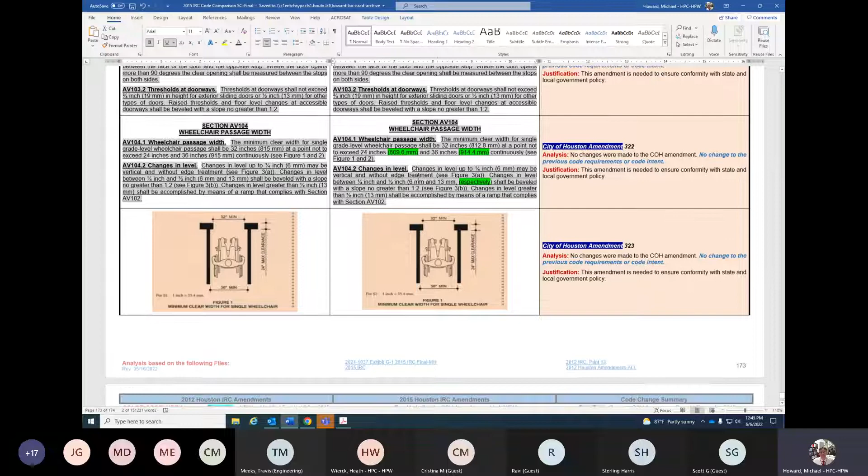Appendix V was adopted by the City of Houston in the '15 code, which is visitability. As you can see, there's not any changes. There were some additions to include the metric system for certain dimensions that were identified. Those same dimensions were identified previously in the other code. For some reason, in the '15 code some of those metric equivalents were not included, and city legal likes to be consistent, so that's why you see those added. There were previous minimum clear width requirements for single wheelchairs under this appendix. Those same details are included in the current code.

That gets us all the way through the 325 Houston amendments to the IRC.

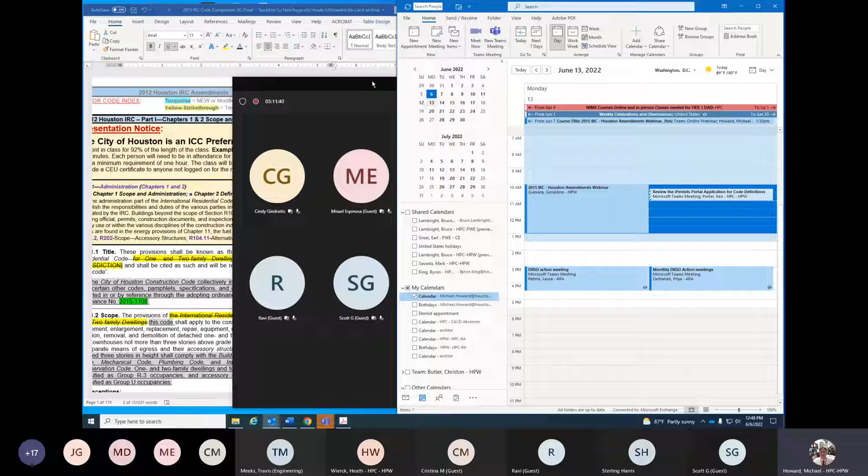We're doing the existing building code now internally. As soon as we finish up those training classes for the plan analysts and the inspectors, we're going to turn right back around and do that for everyone.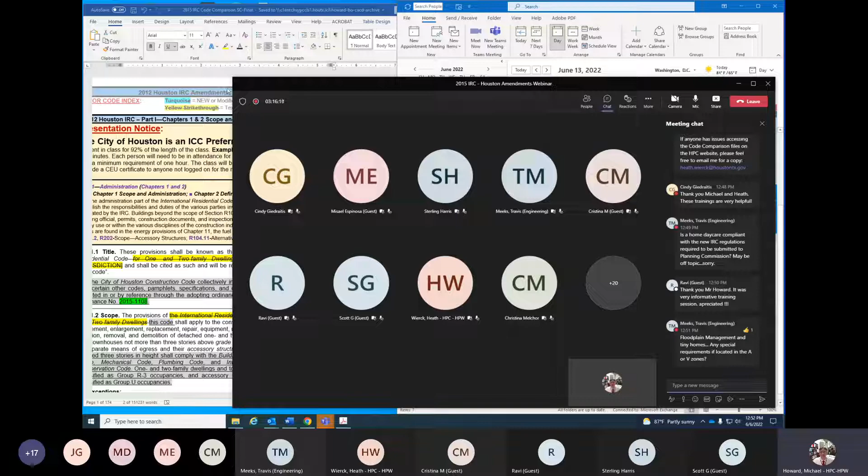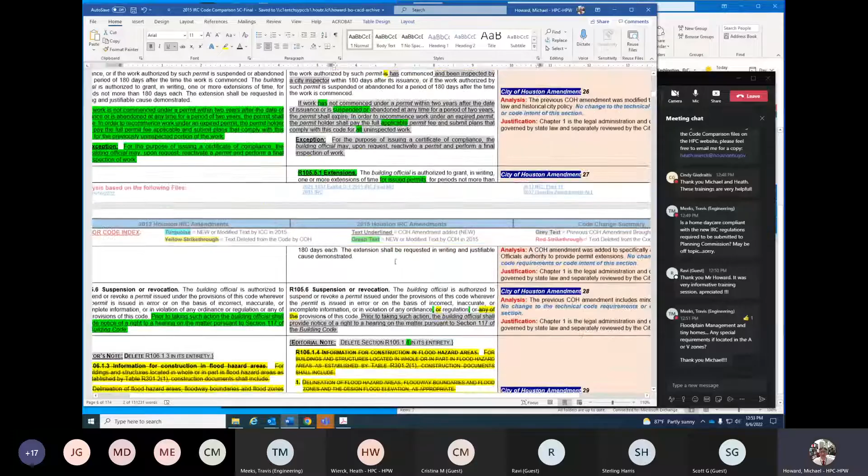Like I said, these documents, and I'm sure you noticed as I was going through here, include a lot of other stuff. They really do. They include all of the significant changes from the ICC, as well as the Houston amendments, so they're very useful at finding changes to the 2015 codes from the 2012 codes.

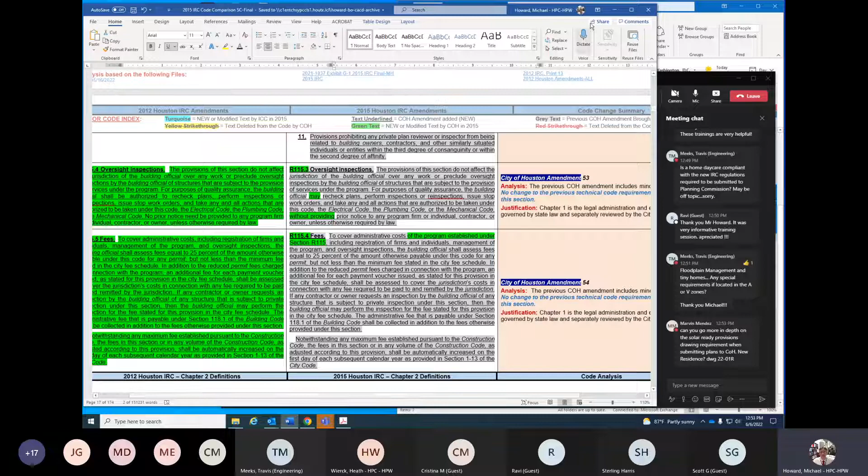I got an email that says, can you go more in depth on the solar ready provisions drawing requirements when submitting plans to the City of Houston? We issued a code word recently that might help. Let me see if I can pull that up. Let's see.

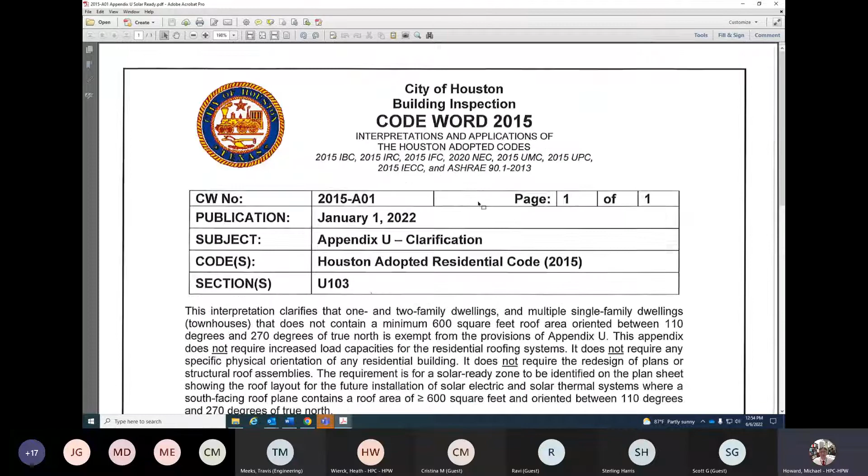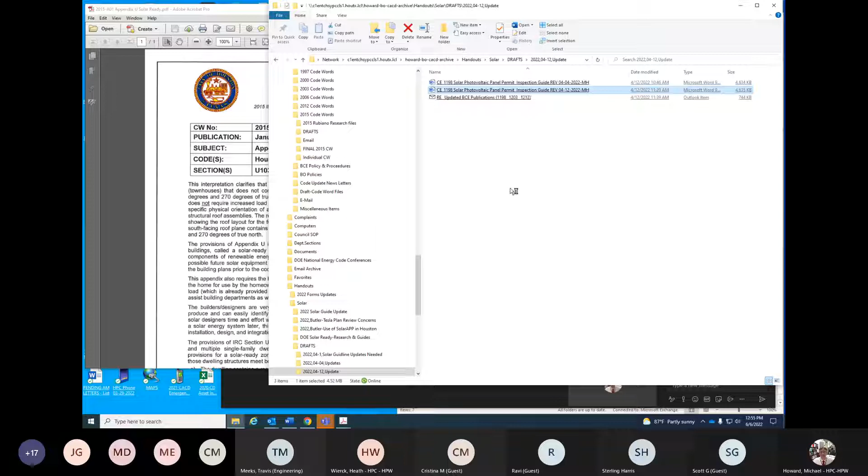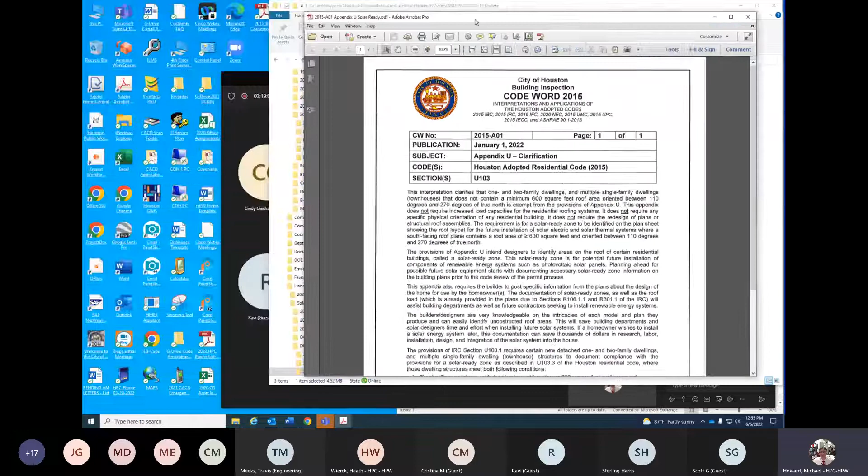Okay, well this is the code word, but there was something else we did, and that's what I want to show you. Let's see. Where is that thing? Let's see. Solar guide, let's see. Tesla solar ready shingles. See if it's in here. That's not it. Let me see where it would be. Drawings.

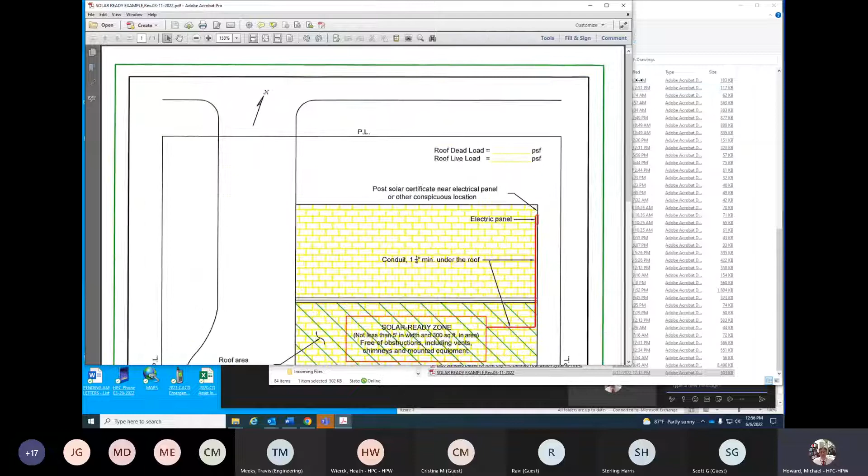We just did a solar example, here it is. This is what I want to show you. This went out recently. It's basically an example of what they're looking for in plan review on the roof layout plan or site plan. You can see here that Maher did a really nice job putting together this drawing that shows the requirements from 270 north to 110 north, and any plane of a certain square footage facing anywhere in that direction has to provide solar ready. That's what he's showing here, in the hash, the plane of the roof facing into that particular direction.

Because of that, now a solar ready zone has to be shown on the plans along with the conduit that goes under the roof over to the electrical panel. You have to fill in the roof dead load and roof live load, not the proposed load for the solar, just whatever the minimum code required roof dead load and roof live load is from the IRC, whether it's the site plan or a roof plan layout.

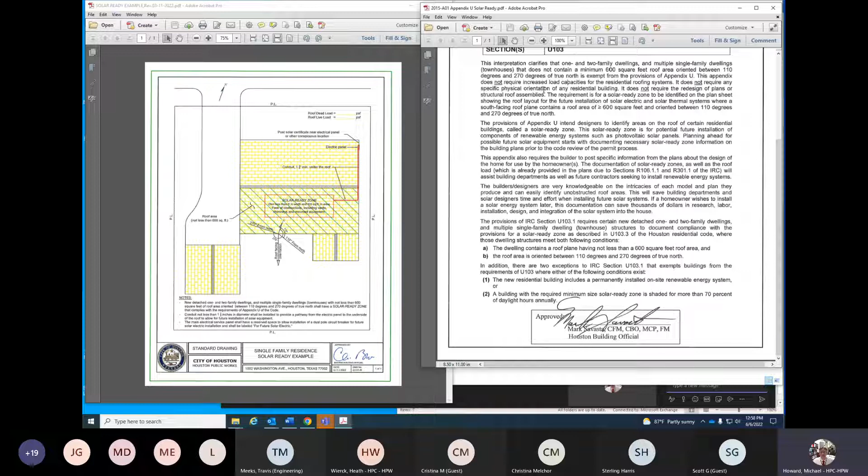But this is just one example. You can include the notes required by that particular appendix, Appendix U. This code word goes into detail about what we actually expect to see on the site plan or the roof plan. We took the requirements identified in this code and tried to give an example of what might be on a particular plan sheet included with the drawings. And this is what we came up with.

That's right, it's residential drawing number 22-01-R. This is available on our website. Anybody can get you a copy of it if you need it to help give you a better understanding of what plan review should be looking for.

I can't think of anything that's not shown in this code or on this drawing that you would have to add to a plan for solar ready. This particular plan might be the site plan, so obviously your site plan is going to have everything else it's supposed to have on it for all the other departments that look at a site plan, location on property, things like that. But as far as the solar ready zone is concerned, the items shown on this example should be all the things the plan analyst should be asking you to provide, nothing more.

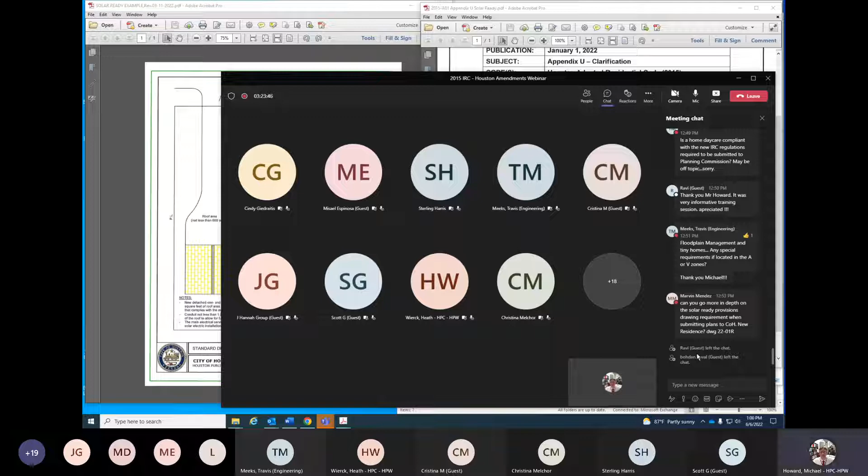I hope that's helpful. We can certainly get you copies of these documents if you need them. Just shoot me an email, me or Heath, either one, and we can get you either one of these documents.

We also recently updated a new guideline for solar submittals. That guideline applies to plans that have to be submitted for review for solar installations. At some point in the near future, the City of Houston is working to have a pilot program to start utilizing this feature, an app called Solar App Plus that was produced by the Department of Energy.

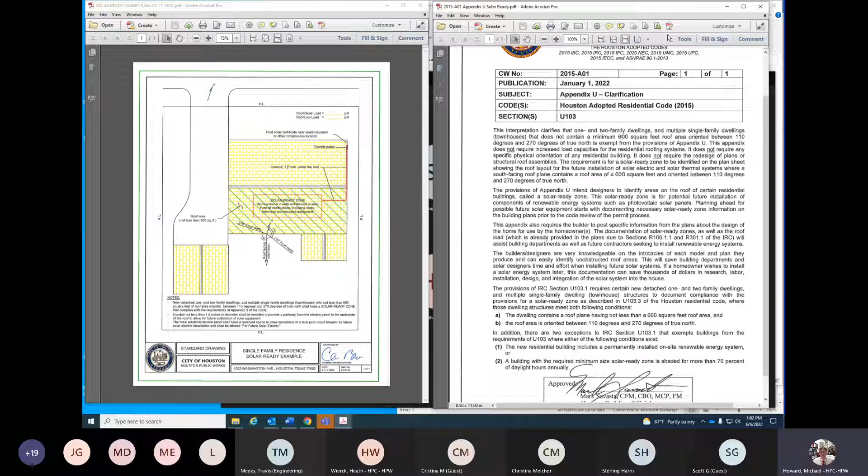As soon as we get all the modifications completed to the iPermits portal and have it fully tested, I think we have one more meeting with the Solar App people to talk about maybe having a few of the City of Houston amendments added to their app before we offer it for use as a pilot program, to see if we can issue permits without going through plan review for these typical cookie cutter type solar installations on existing buildings.

I think the idea is that 85% of solar installations will be able to utilize the Solar App. The way it works is you download the Solar App to your phone, go through the process of completing the questionnaire in the program. It gives you an approval number, and it also issues you a checklist and a couple of other documents that go with the approval number.

Then you upload those documents and that approval number to the iPermits portal under the one-stop plan review portion, and then you would be allowed to purchase your structural solar permit online without having to submit plans other than uploading the documents provided by the Solar App.

Then at some point, the electrician goes to buy his permit. He would have to upload the one-line diagram to that same application, and he would be able to buy his electrical permit online without having to submit any other documents for review through the plan review process.